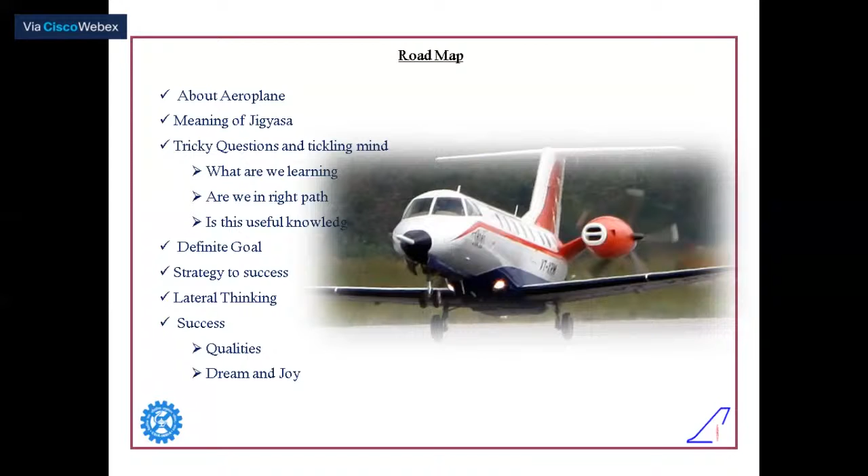So again, let me briefly introduce you to an aeroplane with its different parts. Cockpit is where the pilot sits and drives it. Engine is basically the propelling device which takes our aeroplane forward, backward, rolling, pitching - that kind of thing. Wing is basically... that I will ask you as a question.

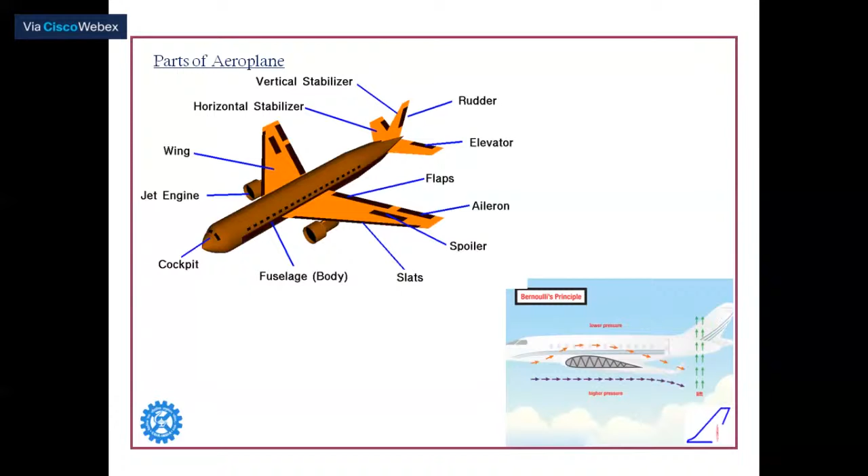The rudder is for horizontal, sideways movement, and ailerons are for lift and similar purposes. As I said earlier, Bernoulli's principle is what actually works to lift the aeroplane - the pressure difference across the wing is what lifts the aeroplane.

As I mentioned earlier, there are four forces acting on an aeroplane: thrust, lift, drag, and weight. Thrust is basically to push the aeroplane forward, and lift is for lifting it so the aeroplane can fly. Drag is due to air resistance on a body in the air, and weight is the gravitational pull of the mass. These are the four forces acting on an aeroplane, and it is our managerial skill to cancel some forces and take the aircraft ahead.

So here, if you see this picture - again something happened to the presentation.

So the corner picture, the right side corner picture, shows these lines. These lines are nothing but the air particles which are moving over the wing - that shows the air movement. If you see the upper portion of the wing, the particles following the top portion of the wing are actually moving faster than the air particles going below the wing. Because of this high velocity over the wing, there will be a low pressure created.

Because of that, what happens is the air present below the wing tries to push all the air above the wing. In between, the wing is there, so what it does is push the wing upwards too, and that's how lift is created. So this is the basic working principle.

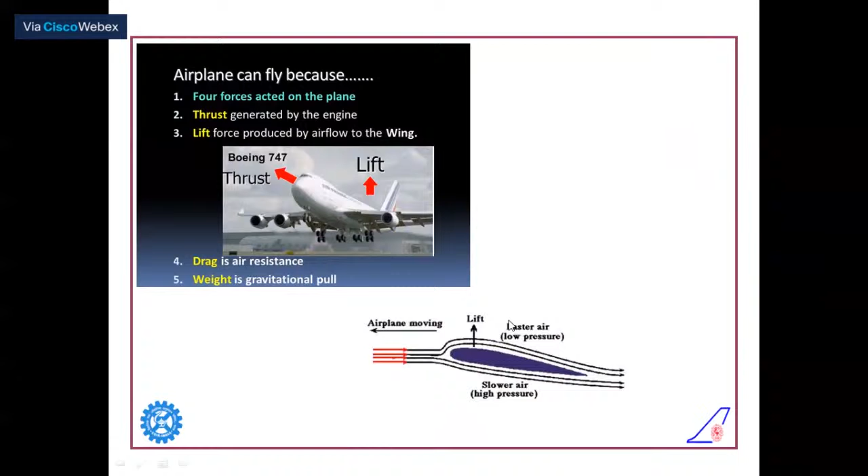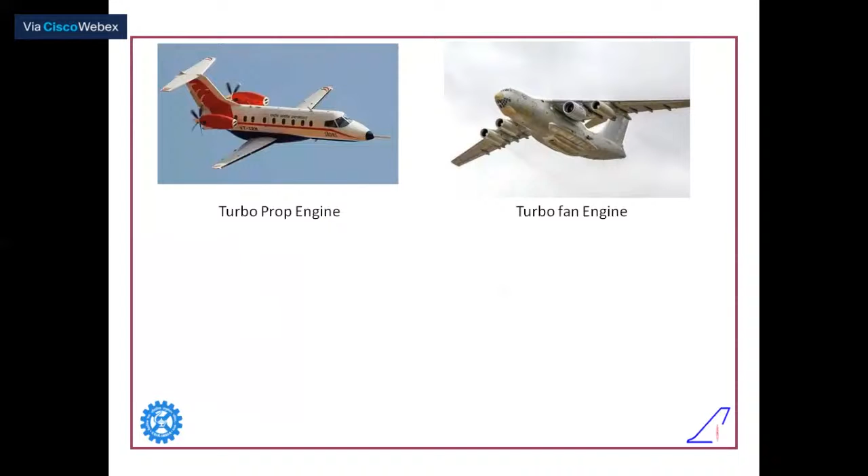Now let us see some beautiful pictures - here you see different kinds of aeroplanes. One is the turboprop engine aircraft. I'm classifying the aircraft based on the engine, because these are the main forces: turbofan engine, turbojet engine, and turboshaft engine.

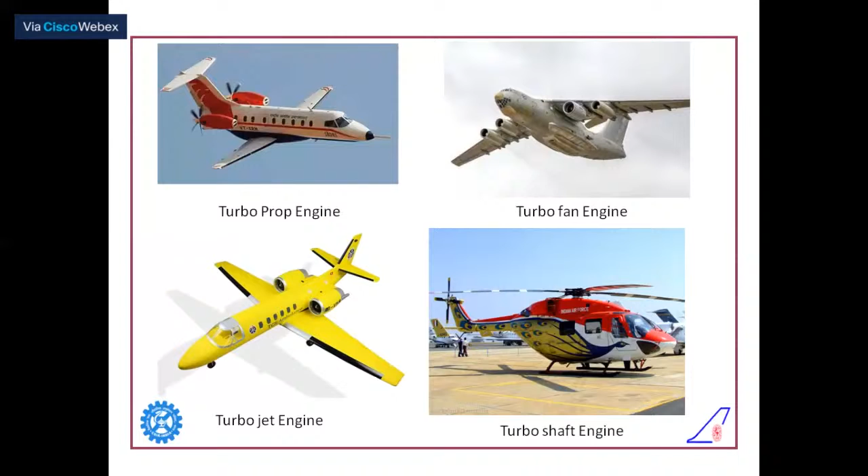Now having seen these kinds of aircraft, you people might have noticed them in the sky probably, or if not in the sky, in the airports if you've accessed them - a lot of different, what are the different kinds of engines? Anybody? Miss Arya, you might have visited, right? So you know. Okay, let me proceed further - I will ask you the questions later.

Now if you see the engine names I told you in the previous slide - turbojet, turbofan, turboprop, turboshaft - these are the four different things. Turboshaft is basically for helicopters; whatever engines helicopters have are called turboshaft.

The basic principle for an engine is simple: first, suck the air from the atmosphere and compress it, meaning increase the pressure. Then allow the high pressurized air into the combustion chamber, inject the fuel, burn it, then allow it to go through the nozzle to get the required thrust. So this is the basic principle, but the application is different - where are we using it, how are we using it, how we are going to connect it to the rotating motion.

So that's where the technique comes. I've given you the definition for only 4 types, but here one more thing is there: the ramjet engine or scramjet engine.

In this picture, you can compare. The air is moving left to right, so the aircraft will move right to left. Here is the cold portion, meaning ambient temperature, and here is the hot zone where temperature is raised. The intake and compressors increase the air pressure by compressing it. Then in the combustion chamber, the fuel is injected and burnt. Then here is a turbine, where the air is expanded, and through the nozzle we get the required thrust.

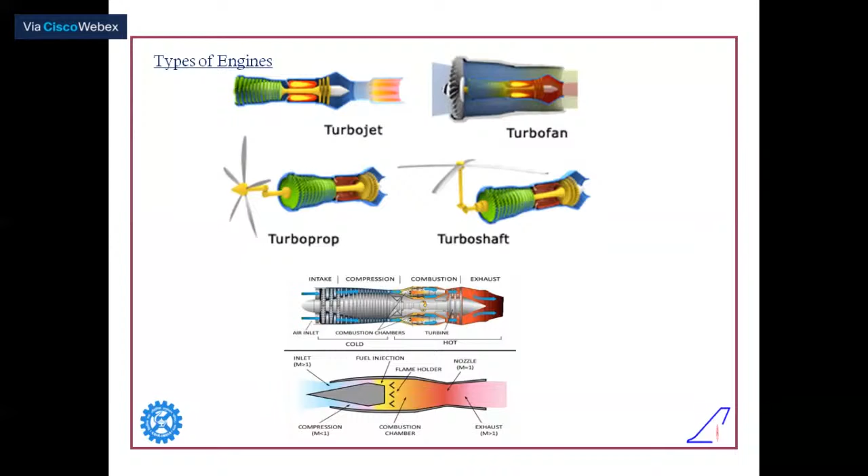Okay, so now, okay, not too much of technical content, right? So let us see some general questions, general topics to discuss.

Okay, so what is the meaning of jigyasa? Curiosity. Very good. Anybody else? Desire to know, to acquire something new. Okay, good. So it is the curiosity, right?

So does it require for us? Yes, very good. So now the thing is how it is going to help. Yeah, tell me, Rosalie. Curiosity is the major requirement to invent something, sir. Very good. So now I'm going to ask you the question.

Have you ever thought of what are we learning throughout our life? Have you thought of this kind of tricky question? What are we learning? Are we on the right path? Is this useful, or what? Aeroplane first - hello? The forces of aeroplanes. Hello? Okay.

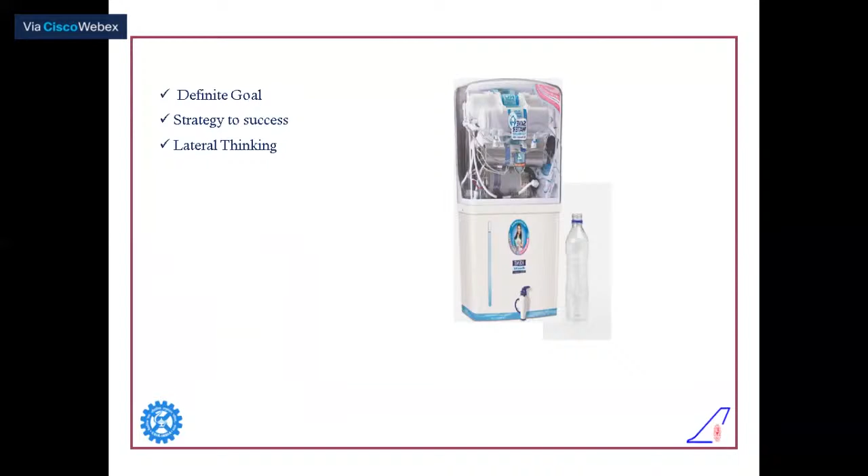Okay, so now the thing is the curiosity we talked about. So with that, we will be driven to learn something, right? So with that, what happens is we should have some definite goal, right? To achieve something. Yes sir, yes, very good. So we should have some definite goal.

So when you have a definite goal, what else do you need? You need to plan a strategy for success - how to achieve that, how to reach that goal. So you should plan it. But the thing is, to plan that, you should have the capability to think differently, to think out of the box. So along with the logical thinking, you should have the lateral thinking also.

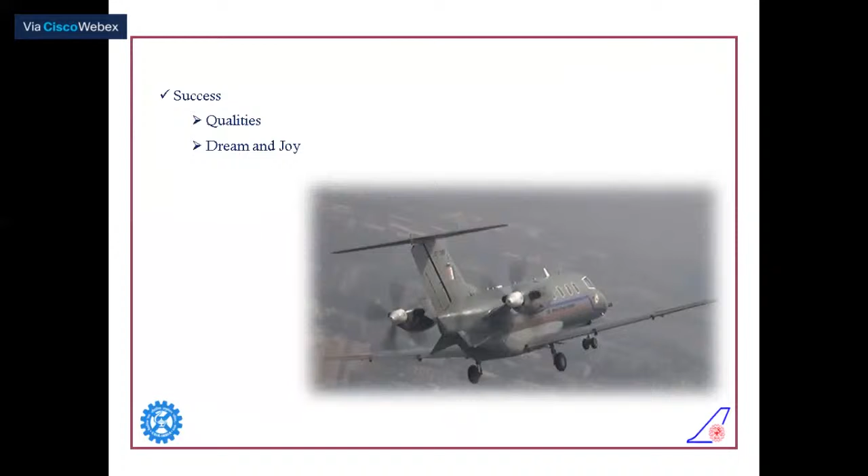Other than that, you should define your own qualities. That will again lay the path for the next generation. Then you must dream and you must enjoy the journey of success. These things will definitely help us in becoming successful.

Yes sir. Very good, who is he? Can you tell me? He was a mathematician. He derived a method for finding prime numbers between 0 and 100, 0 and 200, etc.

Eratosthenes is the guy who actually first defined the radius of our planet. So how did he find the diameter of the earth? It's a basic simple thing - by reading the shadow of one stick, he measured it.

For example, for this purpose, he traveled from Syene to Alexandria. Just see his time - it's 276 BC to 194 BC. During that period, what kind of gadgets did he have?

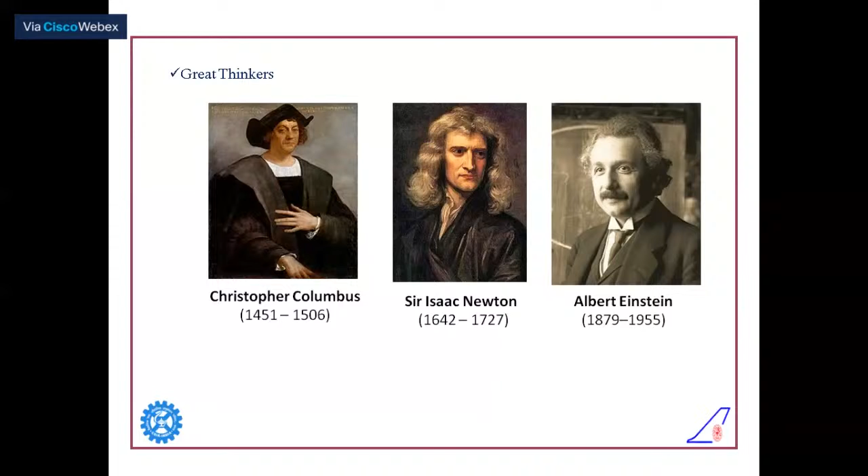Okay, there are so many things to discuss, but here what I want to tell you is I wanted to present how great these people are. Okay, when I present those people, let us see our...

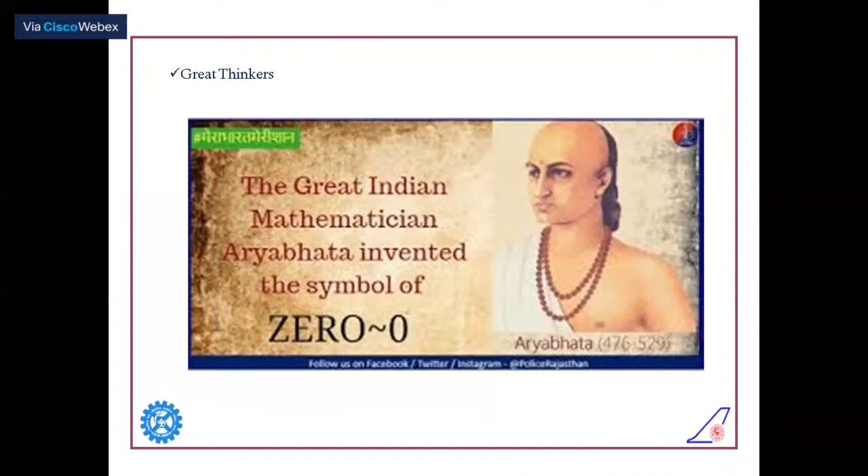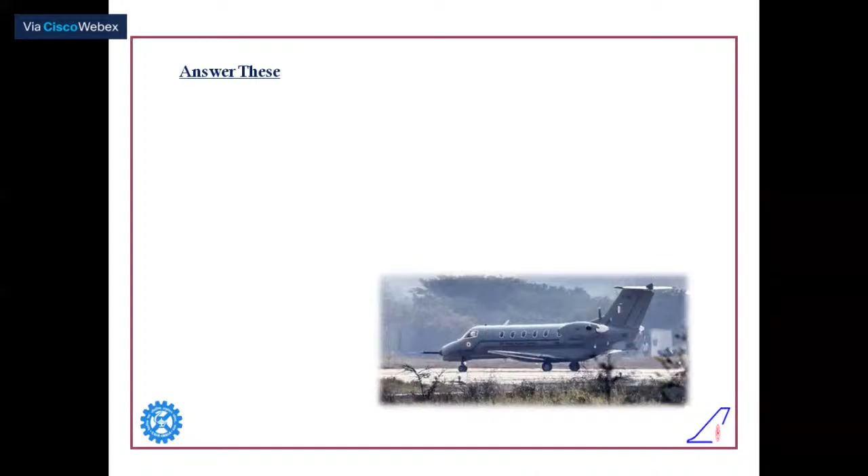Aryabhata, who invented zero. Very good. Along with the invention of zero, he also said that solar and lunar eclipses were caused by the moon, not... Very good. Yes, so there are great things to discover and find out.

Ultimately, it requires our curiosity, or jigyasa, to do that. Okay, so now answer this simple question, which is on your screen.

Can anybody answer what is the answer for this equation? Tell me. Sir, zero. Very good, zero. Now most of you got zero. Answer is zero, marks 100.

Okay, now tell me how you did the calculation. First is 99, and then 1 minus 100 is minus 99. So 99 plus minus 99. Okay, so you did 99 minus 99.

Anybody else did it another way? Okay, tell me. Before the first term, 100 minus 1, there are dots, which means it is probably a very lengthy equation. So you can safely assume the answer might be infinity.

What is before it? Okay, so here my point is, we got the answer. Most of you said zero. Very good. So the thing is, some people have done plus 99 minus 99. What I'm telling now is plus 100 minus 100 cancels, plus minus 1 plus 1 cancels.

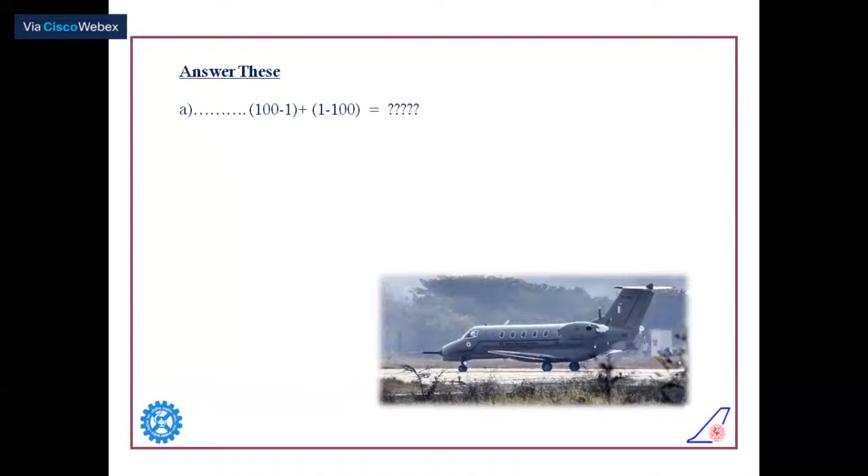So now how does an airplane fly? That actually I did not explain much for you, but I gave the glimpses. You can think about it later. You need not answer now here.

Now you can answer this question. How does a detergent remove stains? So, anybody? Yes.

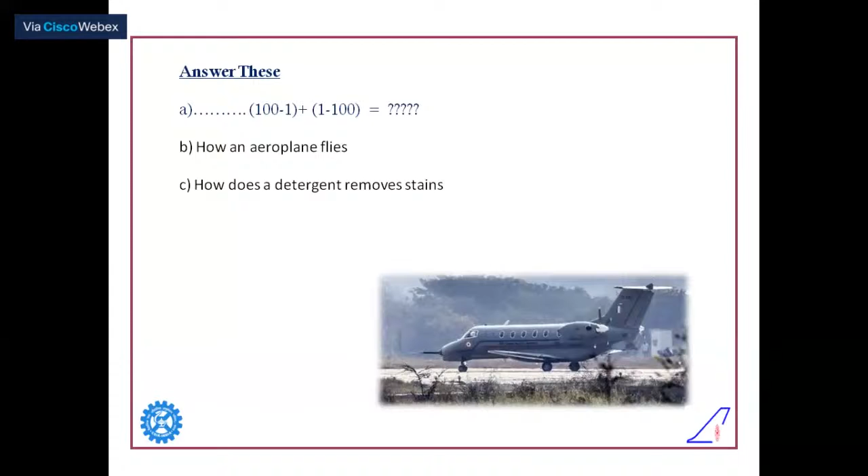A detergent is in fact a complex molecule which has two ends. Just think of it like two people holding hands. One end is hydrophobic, which means it does not like water, and the other end is hydrophilic, which means it loves water. So what happens is most of the stains are probably grease or oil based, having a hydrophobic end. It comes and attaches itself to that and slowly lifts it off. Very good.

So Soumya was raising hand. Soumya, would you like to say something?

So what you said is exactly correct. So it's actually the chemical reaction. So why did I put this question?

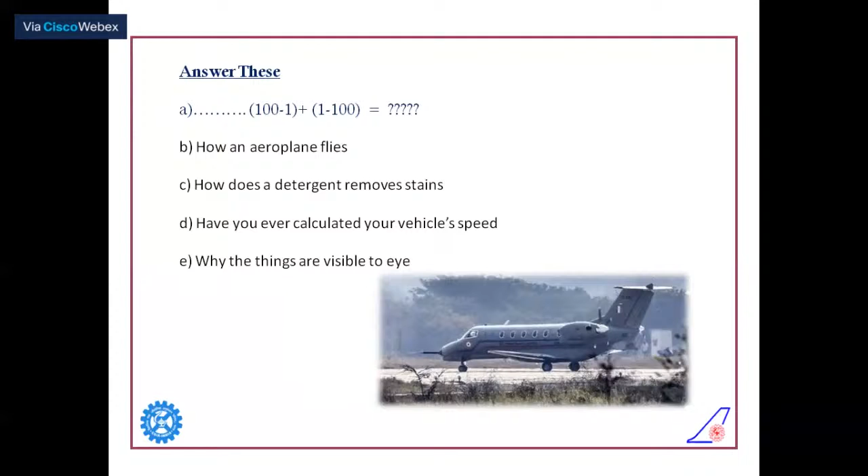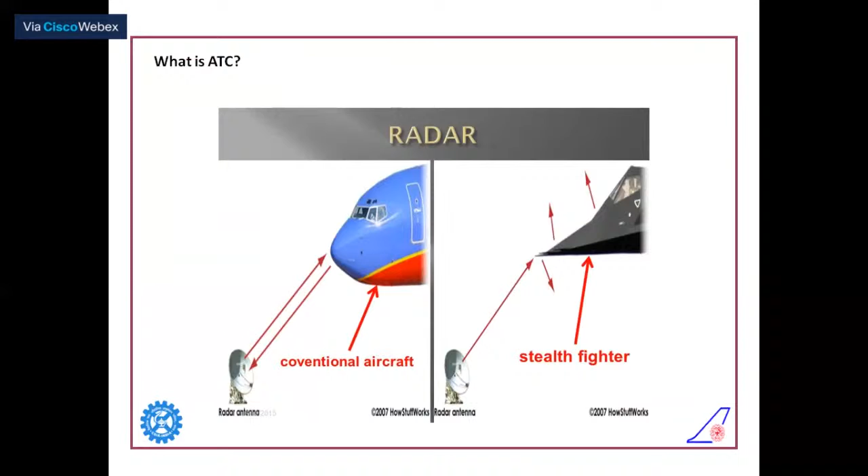And now the stealth, I have given the pictorial view of how that comes. You can see the radar signal, how it is hitting and how it gets deflected rather than getting reflected back to the same source. Okay, now this is the end of our journey.

So before going for the question and answers, now I want to ask you one question. Have you noticed this aircraft throughout my presentation?

As I told in the beginning, can you tell me what did you notice about this aircraft?

Anything else that you have noticed? The unique thing about this aircraft is that its propellers are behind, not in the front of the engine, sir.

Sneha, you can tell. Keep on speaking. Sir, special about it, it has a turboprop engine, and its wings are below, unusually than other aircraft, which have wings above.

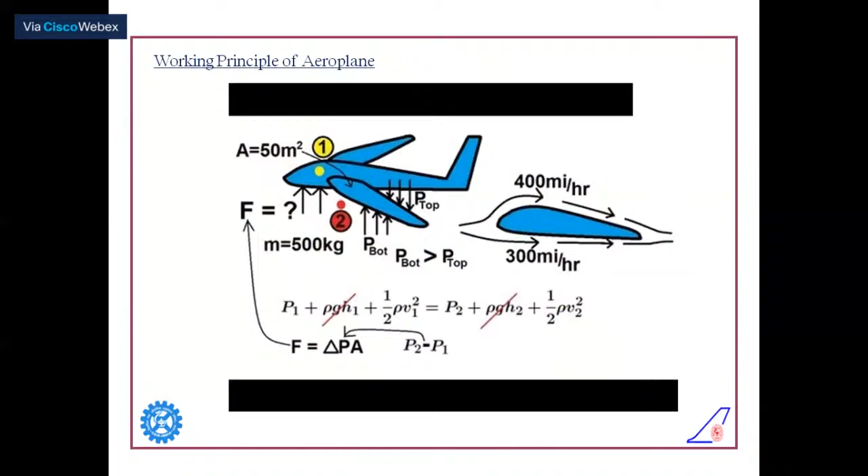So now, again, one more time, I'm going to change the slides quickly. You can just notice the aircraft and tell me. Now you can see the aircraft.

Now, can you notice anything about the aircraft? Conventionally, sir, most airplanes have engines underneath the wings. This one has engines in the tail, the tail section is one side up, and where the elevators and tail fins would be are replaced by those engines. Vehicles are able to fly by gaining support from the air.

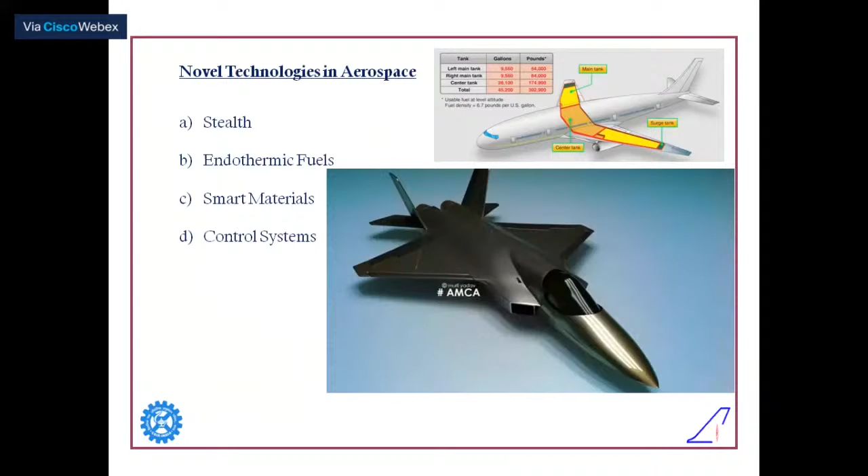Sir, what is the difference between cruise and ballistic missiles? The cruise missile is basically powered by an engine. It will move with certain velocity and it can be controlled. The ballistic missile will go to a certain altitude and then be released. There will not be any power system to add thrust to it, and it cannot be controlled, and it will go to the land. It's like a free fall kind of thing. So that is the difference between cruise and ballistic.

Sir, does India have an ICBM, intercontinental ballistic missile? You should tell me now. Did you find anywhere? Yes, sir, India has BrahMos and Agni. Agni 5. Very good.

So now I'm stopping the sharing. You can have the video so that we can have better interaction. Any more questions, please? I think students don't have any questions, they already asked you during the session. Is there any more questions, students?